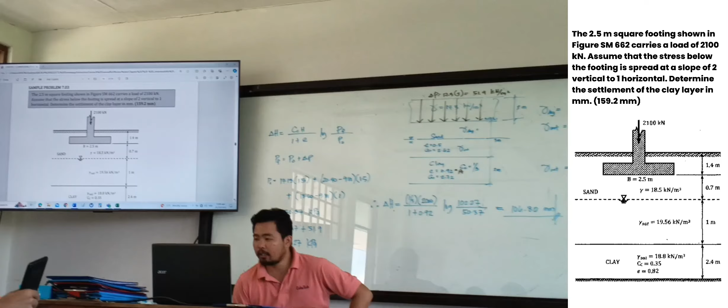A load of 2,100 kilonewton. Assume that the stress below the footing is spread to a slope of 2 vertical, 1 horizontal. Determine the settlement of the clay layer.

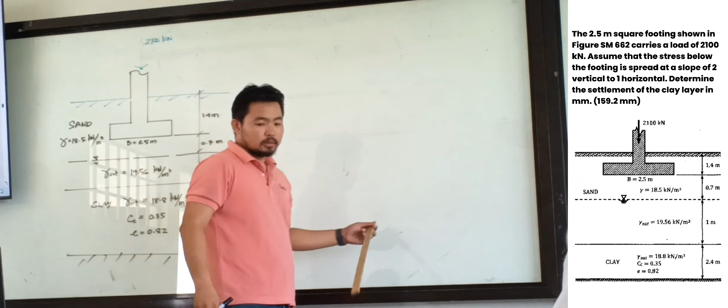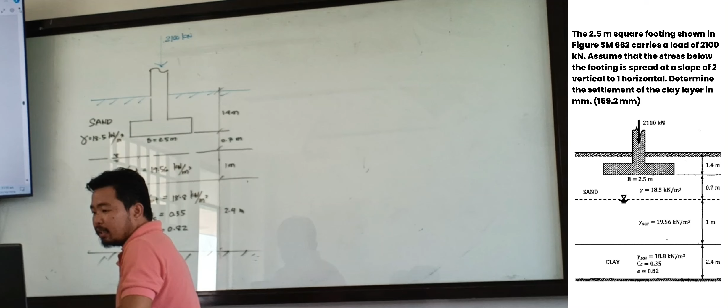And there is a problem. 2.5 meters square footing. There's a load of 2,100 kilonewton. Assume that the stress below the footing is spread at a slope of 2 vertical, 1 horizontal.

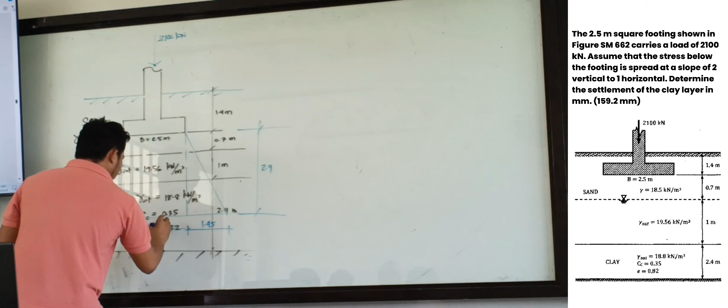Determine the settlement of the clay.

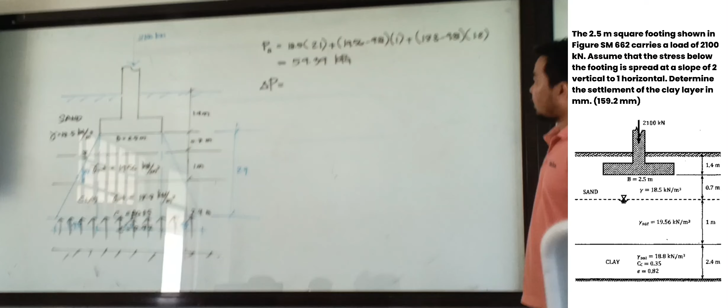Change in pressure due to this load, due to the footing, and the load is 2,100, maybe from a column of a building.

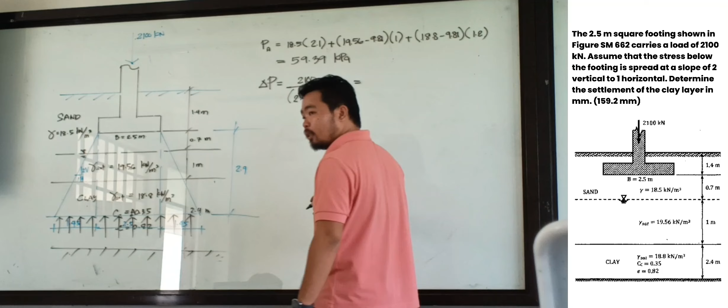72.02, and this is still 59.39 kilopascal.

Kilonewton per square meter. Given a CC, given, but this is still primary consolidation.

Delta H, CC is 0.35. Then if we want the settlement, the depth of the clay layer, total depth is

2,400. This is 2,400. And then 1 plus void ratio, void ratio.

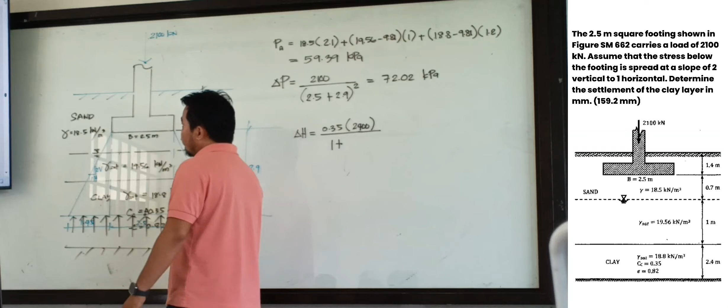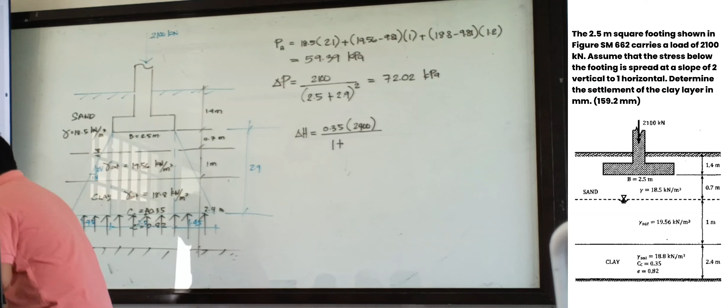Logarithm of, and that is 59.39 plus 72.02, all over 59.39. So this is equal to 159.2 mm.